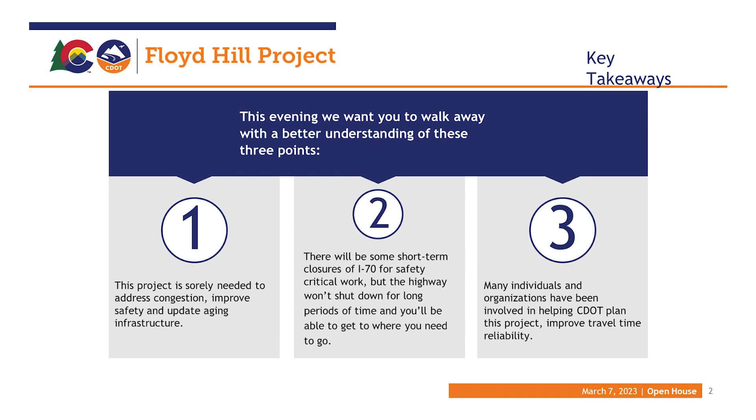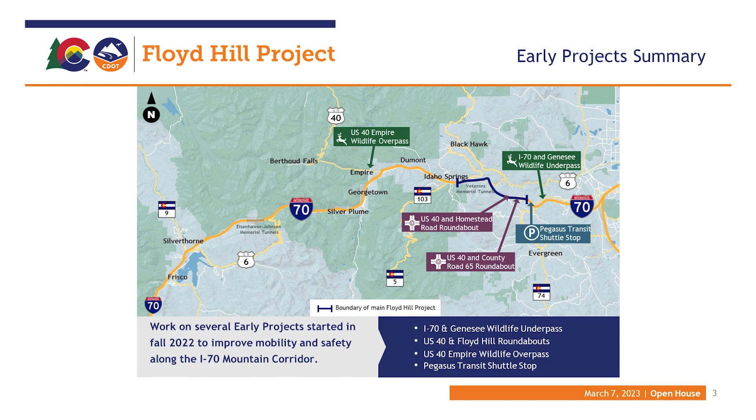So now moving to some of our early projects. We have a handful of early projects that address safety and mobility out in front of the main Floyd Hill project. If you drive the corridor now, you start to see some of the construction. We have a wildlife crossing under construction now at Genesee. We also have roundabouts that have started at US 40 and Homestead and US 40 and County Road 65. We also have a wildlife crossing slated to go to construction later this summer at Empire. And the final early project is a Pegasus transit stop at El Rancho, which will add to the network of Pegasus locations for stops along the corridor.

The need for the project—this is a congested corridor. One of the big things unique about this corridor is that it's not resilient, meaning it's the only way through here, and the detours if I-70 is closed are extensive.

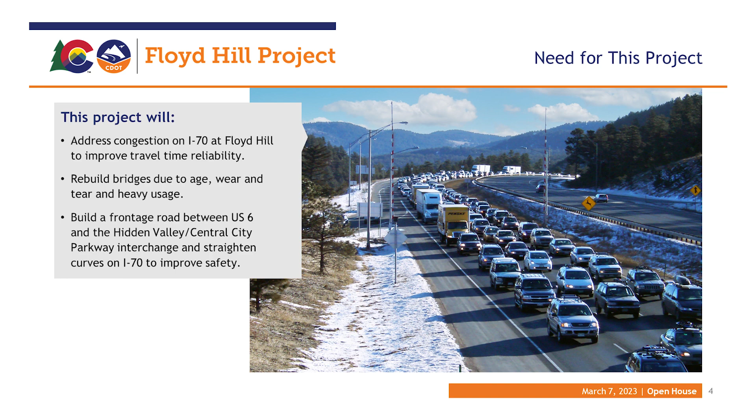One component of this project will add a connection from the bottom of Floyd Hill at the US 6 interchange, tying into County Road 314 at the Hidden Valley Central City interchange. This will benefit residents and provide resilient access for emergency responders and another route if the road is closed due to an accident.

Moving on to our timeline. We are moving towards construction, slated to begin in June of this year. Floyd Hill is a CMGC project, which we're delivering in packages—three primary packages. The first, the east section, starts on the east end of the project between County Road 65 and Homestead and continues most of the way down Floyd Hill. That will start in June of this year.

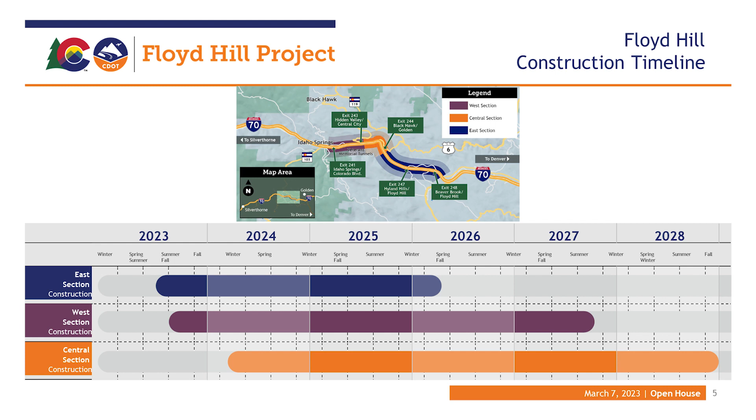Package 2 is our west section, covering everything from Hidden Valley Central City interchange to exit 241, the first exit heading west toward Idaho Springs. That package is slated to begin construction late this fall. Our third package is the central section, covering everything from most of the way down Floyd Hill around to Hidden Valley Central City interchange, slated to go to construction in early 2024.

As I mentioned, this is a CMGC project. So what does that mean? The typical CDOT project is design-bid-build: we develop the plans, design them, advertise to the contracting community, take the low bid, and then move into construction.

CMGC is a little different. At the beginning of last year, we selected a construction manager, Kraemer North America, who works alongside us as we design the project. There are several benefits—we get the construction and contracting perspective as we work through design elements, hearing what will work in construction, what the challenges are, and finding refinements that provide cost savings and other benefits. That's led to a lot of innovations because we're constantly engaged throughout the project.

The other component of CMGC is that we can deliver it in packages, so we don't have to design the whole thing at once. For example, our central section is only at about 30% design, while our east section is going to 100% design. With that, I'll turn it over to our CDOT construction manager, Jeff Hampton, who will give more detail on the project improvements.

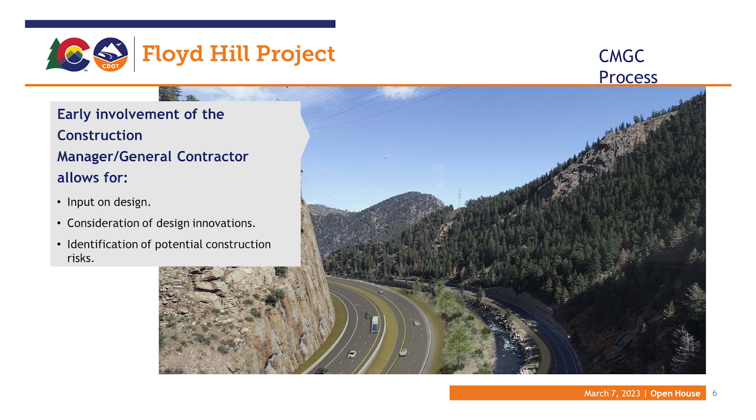All right, good evening, everyone. Happy to be back up here at the school again—I see a lot of familiar faces. I've been up here for almost 5 years now. I was a project engineer on the westbound PPSL project, so I'm pretty familiar with the area.

Kurt talked about a lot of the improvements we're making for the project, and Commissioner Wheelock referenced the bottleneck. That third westbound travel lane is going to help that—it's a full-time tolled express lane that will give us the trip reliability everybody desires. So someone coming out of Denver on a Saturday morning to go skiing will know how quickly they can get to the resorts and have a reliable way home.

Constructing the frontage road between US 6 and the Hidden Valley Central City Parkway interchange. We all know that issue, that left-hand ramp coming up right at the bottom of the hill. Everybody stops right there. By moving that 6th Avenue traffic a little further to the west, creating an intersection that handles that traffic better, it's going to help that movement be a lot more fluid and keep folks moving in the right direction.

The extended on-ramp I just talked about on US 6 going west, we're also going to do one eastbound. It's going to come almost all the way to the top of the hill so that the trucks coming up aren't impacting the traffic moving along in those continuous lanes. So from the bottom of the hill to the top of the hill, truck traffic is going to have a way to take their time, get up to speed, and get merged in instead of doing it down at the bottom.

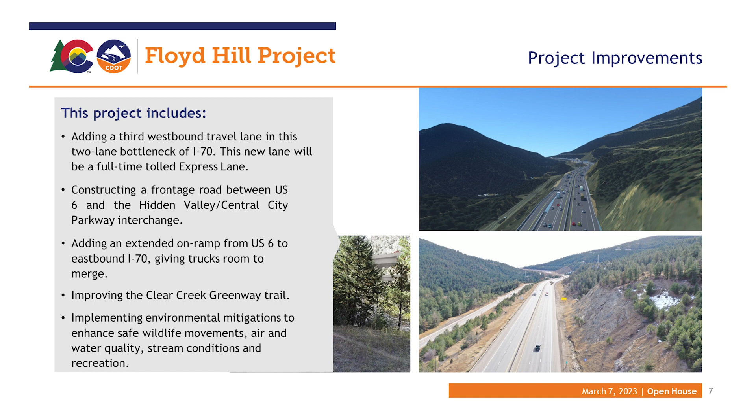The mitigation commitments that we have here are about minimizing the project's impact on the surrounding environment. Again, I was up here for westbound PPSL. It is ingrained in me how important that environment is to what we're doing and how we do it in construction. So making sure that we're doing things right and we're not having an adverse effect at the end of the project and even during construction. It's a lot of equipment, a lot of extra people. We're going to have those mitigation things in place to make sure that we're taking care of the stuff around us.

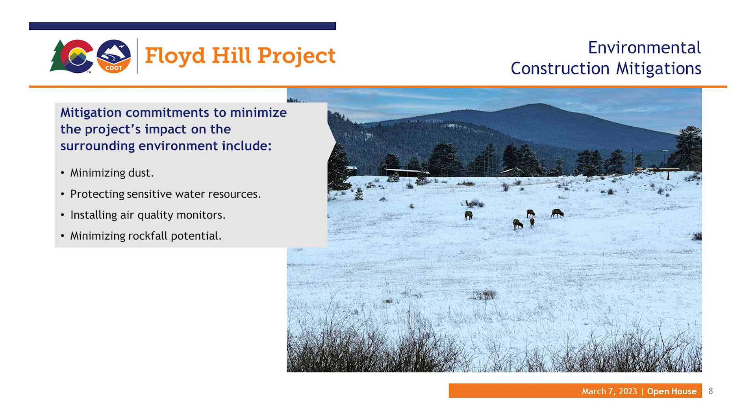So during construction, this was the big one. I know Kurt got a clap for telling you that we're going to keep traffic moving. I'm the guy that has to make sure it keeps going, and it does. Thanks, Mary Jane - it stops with me. So if traffic's not moving, I'm the guy that has to answer for it. And all these folks have my phone number, so I'm going to hear it from them too. But I get it. I spent 2.5 years building a project up here already. I understand the traffic, I understand the needs of the communities. So we are going to work together to make sure that when we do have impacts, y'all know.

Commissioner Wheelock said it - there's going to be a little bit of pain. We have to stop traffic to blast rocks. Sorry, you know, you might have some folks that you might want under those rocks - I can't do that. So we're going to make sure things are done safe and done right, and that is going to involve traffic impacts. But we're going to tell you. You're not going to wake up on Tuesday morning getting ready for a doctor's appointment in Denver and wonder why they didn't tell you they were blasting today. You're going to know. And if you don't, you're going to know who to get a hold of to find out. We'll make our process better and make sure you know the next time.

So the rock blasting, rock scaling, most of our work that needs a lane closure is going to happen overnight. When those times come up, we're going to advertise this stuff. Temporary lane shifts - we've got to create room for the new lanes. So to start the project, we're going to shift all the traffic to the north. That opens up the whole area on the south side to start work. As we work through phases, we move traffic around again, and we're going to communicate these things. We've got a great website, we've got a great PI team that's going to help us with all of this. That information will be out there well in advance. We don't want you to be surprised when we start making changes on the highway.

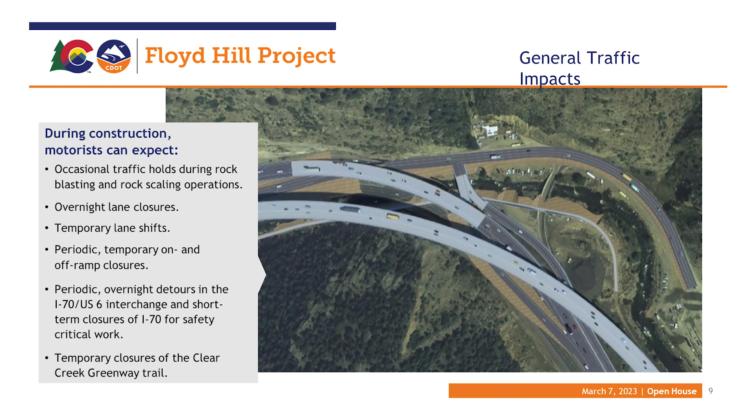Not everything can be done in an overnight lane closure, and we're going to communicate that. Last couple things here, periodic overnight detours, temporary closures of the Clear Creek Greenway Trail. All part of what we're going to do to get this project done. We're just going to make sure that everything is communicated very well.

So efforts to keep everything moving, all the lanes and ramps open during those peak traffic hours, mornings, evenings, weekends. We get it. We know when the traffic picks up around here. So we're going to make that effort.

I can think of maybe 2 occasions in 2.5 years on PPSL where we had an impact, and those were rocks that were out of my control. Everything else, we had a good plan in place, and I think we executed, and we've got a great team to help us do that here.

Ensuring the lane closures are responsive to current traffic patterns. We're tracking these things. It's not old CDOT where we just say we'll take a lane when we need to. We're watching the patterns. We have information that's within days. So our traffic group is really good at watching what's happening, updating models, and helping us be more proactive in what we're doing.

The complex work above the roadway so it doesn't impede traffic. We're going to do some cool stuff with these bridges where you're going to be driving underneath and seeing the work happening. You're not just going to show up one day and all of a sudden there's a bridge there. It's going to happen while traffic's going by.

And the new roadway sections being built adjacent to current lanes, you can see in some of the pictures as you go around to these boards, we're not building on main line for a lot of this project. We're going to do a lot of work off to the side and then put you on it when we're done.

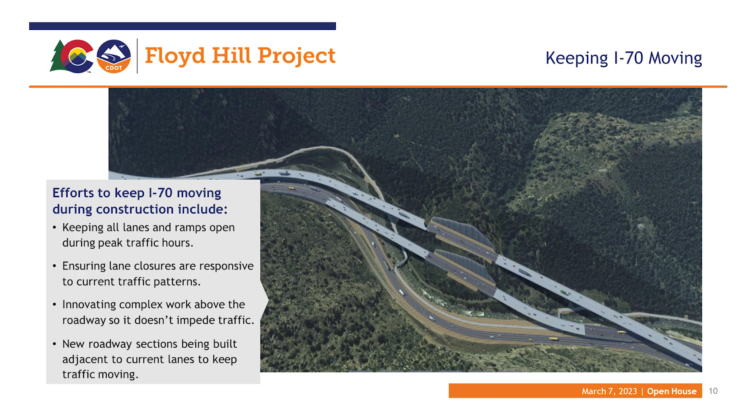So the last slide I have here, CDOT safety efforts and the things that we're going to do throughout construction. We'll have emergency pull-off areas. We're designing that into the project to make sure there's safe places to pull off when we tighten these lanes up and squeeze everybody together.

Traffic stops I've covered during the rock blasting and scaling. A lot of the construction activities are going to happen behind barrier. So you're going to see it, you're going to see us working out there every day.

Reduced speed limits. Everything's posted at 55 right now. I would say for a majority of these things, we're going to try to knock it down a little bit more just to make it safer for us.

Coordination with emergency response agencies. We had a meeting just last week. I know I've seen a couple of folks here tonight and talked to them. We will have continuous meetings with emergency responders. It's not going to be a knee-jerk reaction if something goes wrong because we're going to have planned it out ahead of time.

We know the conversation I had with Sheriff Albers already tonight is about how's traffic going to get through on 314 if there's an emergency when we start our construction. We're already coordinating this months in advance, talking about what the possibilities are and how we can plan and make sure we've got something in place.

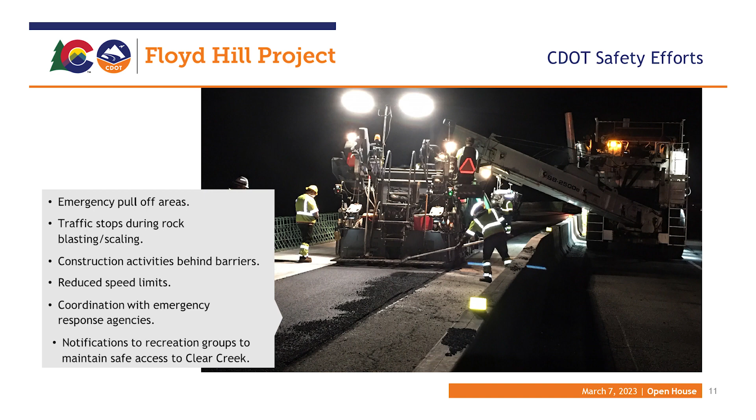Lastly, the notifications to our recreation groups. I mentioned the rafting community, I know how much they value that river. I'm a fisherman myself, I've been on just about every part of Clear Creek up here. I get it, there's a great bike path, this is a wonderful place to be able to recreate. I don't want to impact something I enjoy, and I want to take care of that for you guys as well. So we're going to do our job.

We've got, like I said, a great communications group to make sure we're letting people know what's going on. So with that, speaking of the guy that's actually going to do the work and not just talk about it, here's Matt Hogan with Kraemer. Thank you.

I'll repeat it again: I-70 will be open during construction. If it's not, Jeff will call me and ask me why it's not, and then we'll work through that together. So one of the takeaways is we're going to keep I-70 open.

They asked me to come up here to talk through a bit of the scope, but really the designers in the room are probably better at it. Unfortunately I'm the face you're going to see for 5 years, so they asked me to do it. But we wouldn't get here without the designers - Tammy, Matt, Anthony, Kevin, Joe - all the people working tirelessly to allow us to get to construction. Thank you all for what you're doing.

In the east section, just a couple things we've talked about already, but I want to make sure everybody understands. Some of the improvements we're doing there - we've mentioned that extra lane coming up eastbound. That's going to be an actual fourth lane all the way up and over the top of the hill so that trucks have a chance to merge at speed. I think that's a fantastic thing that's going to happen. The wildlife fencing throughout this corridor as well is just one of those big safety improvements.

As Kurt mentioned, this project needs it for safety. So that is what we're going to do in the east section, from 247 all the way to Soda Creek where it goes underneath the highway there - we are going to be adding wildlife fencing. So all those beautiful elk we see in the meadow, we're not going to see them on the highway where we don't want them. We're going to see them in the beautiful meadows and using wildlife crossings to safely cross the street. So we're looking forward to that in the east section.

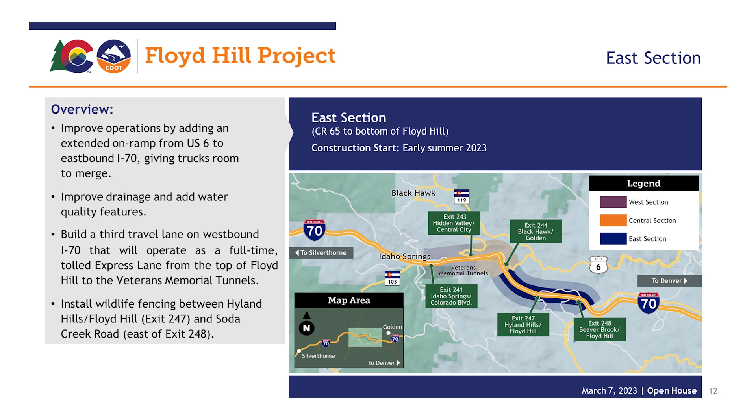So the east section we mentioned we're going to start first, and that's really to set us up for the future of the package. By getting early phases of the east section done, by the time we start the central, we'll have traffic where we need it to be able to be expeditious in how we attack the central section.

The second part is the west section, and this is a fun section. It ties into the Veterans Memorial Tunnels that Kraemer had the opportunity to build 10 years ago. So we're thankful to be back up here in this corridor working with this community again. But everybody that leaves those tunnels going eastbound knows exactly how tight that curve is, or if you're coming from Hidden Valley into those tunnels, you know how tight that curve is going in.

Again, it's about safety, right? So we want to flatten those curves. That is happening all the way to the north, which is something we worked together with the designers and CDOT on early to find that alignment. And the beauty of that alignment is we don't touch County Road 314.

So when County Road 314 is done later this fall with the improvements being made just past the water treatment center, that will be open during construction. So while I-70 traffic is using that and getting to where they need to go, we're going to have better connectivity through the project during construction. Not only is I-70 going to be open, but County Road 314 is going to be open as well during construction. We look forward to providing that opportunity. The refinements we made through design helped us keep that as an opportunity there.

The other nice benefit of the west section, for those of you that may live on the east side of Idaho Springs, there's going to be a sound wall. So those of you that were near where the old skate park used to be, across from there is going to be a sound wall that's going to help mitigate some of the noise that comes off the highway into that area. So that's just another one of the improvements being made as part of this project.

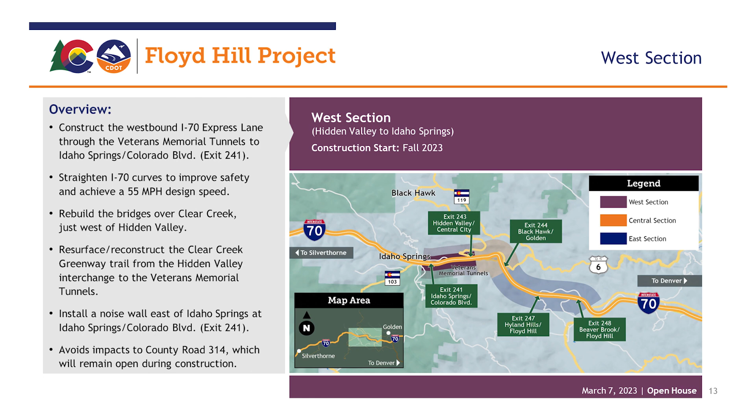As we go into the central section, which is where all the really fun stuff is, and it just takes longer to design, which is one of the other reasons we're starting there - this is where we really get to do the improvements.

We're continuing all the lanes through that area. One of the fun facts, using round numbers, is that currently there's about 80 feet of paved roadway in the central section through that canyon. We are taking 80 feet of paved roadway and turning it into 140 feet in the same space.

That is not an easy thing to do, which is why we've chosen the alignments as Jeff talked about today. By building offline and getting things stacked above each other, we're able to build offline, move traffic to the correct location, and then continue the work, all in an effort to keep I-70 moving during construction.

So we're going to improve all those curves through that area and then really complete that tie-in for the eastbound on-ramp in that area. We're going to phase that work again so that we can maintain all the lanes of traffic during construction.

And then as we finish it up, the beauty of being able to work right along the creek and the greenway is that we have an opportunity while we're there to improve the creek and the greenway and make that part of the community that's going to last.

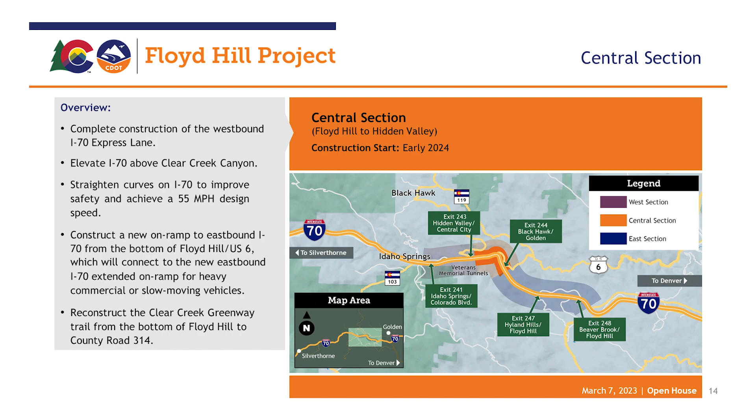Anybody that knows that goes through there knows there's a big steep hill that's pretty tough to walk. I get tired on it, so we're going to make sure those are ADA compliant. As we mentioned, we'll get some better access down into the river sections for rafting and fishing. So Jeff, while he's working, he can just watch us with his fly rod, make sure we're doing things correctly.

But we're looking forward to all those improvements and really continuing to be a partner with this community as we move forward. With that, I would like to turn it over to Stacia Sellers, the CDOT Communications Manager, to talk a little bit more about other things as we move forward.

Lower this significantly. All right, thank you everybody for coming out.

As Matt said, I am the communications manager for this project. It's really my job to look at ways that we can integrate ourselves into the community more, support your needs, and bring your needs to the table with our project team.

During construction, we are going to be advertising various travel options to get more vehicles off the roadway. Margaret touched on this a little bit earlier, but we're going to be promoting the RideShare app to have folks carpool, and then also we have the Pegasus shuttle, which hopefully will get more folks into the same vehicle.

Less vehicles on the roadway means improved traffic flow, and then hopefully after construction, this also changes folks' mindsets. So once construction is complete, you have more people traveling in one vehicle, which reduces congestion and also reduces emissions.

We will also be promoting the GoI70.com website as well, so folks can start to plan their trips ahead of time, and that will be used in conjunction with cotrip.org.

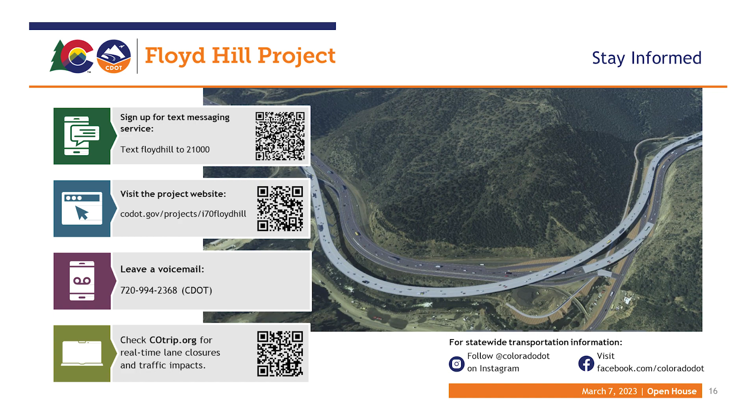We really want to hear anything that you're dealing with as a driver and as a resident within this community. Again, it's really a priority for us to make sure we're addressing your concerns, so this can be a positive project for all.